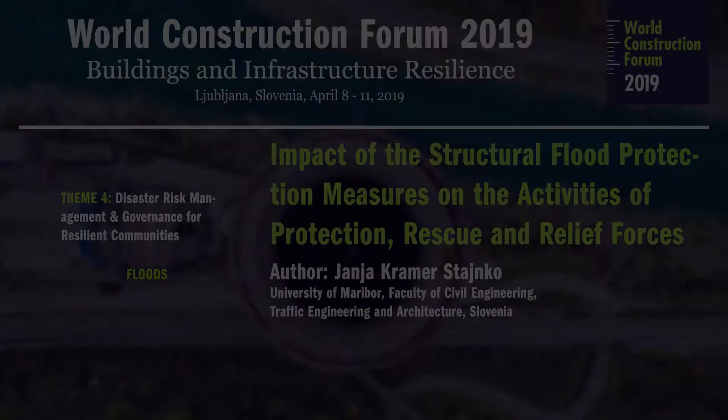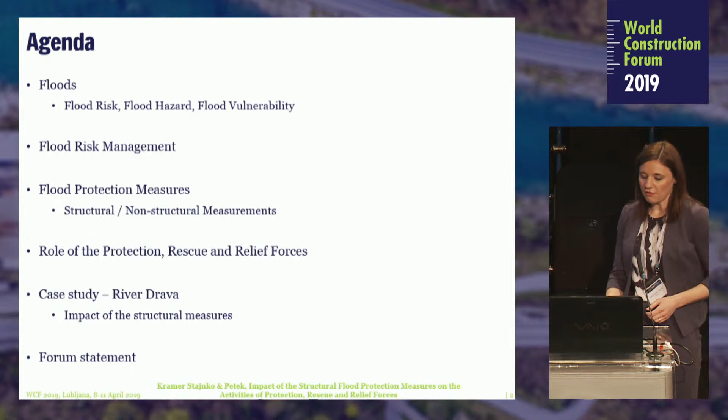I will also talk about the floods, since flood events in Slovenia are becoming more frequent recently, and also the intensity of flood events are growing. In my talk today, I would like to stress the importance of cooperation of different participants when fighting against floods, especially the role of protection, rescue, and relief forces. That is why this presentation was prepared together with the Firefighting Association of Slovenia.

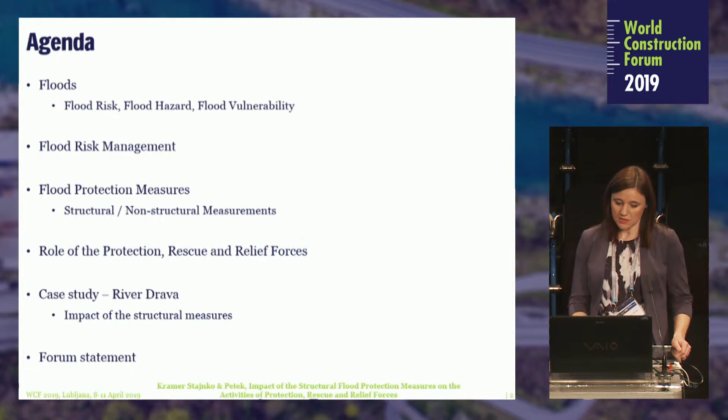I will present a case study on River Drava. In the last 7 years, we were victims of 3 flood or high water events, and during this time some structural measures were performed. At the end I will show a short analysis of the impact of these structural measures, especially on the work and activities of the rescue forces.

Flood events are a consequence of extreme weather conditions, and the flood risk in general is a function of unknowns, which is the flood hazard. This is mainly caused by natural phenomena, and we do not have a lot of influence on that, because it's solely natural. On the other hand, the flood vulnerability, which is a consequence of human activity and presence, we do have some impact on. We can prepare ourselves and make prevention measures to lower the flood risk.

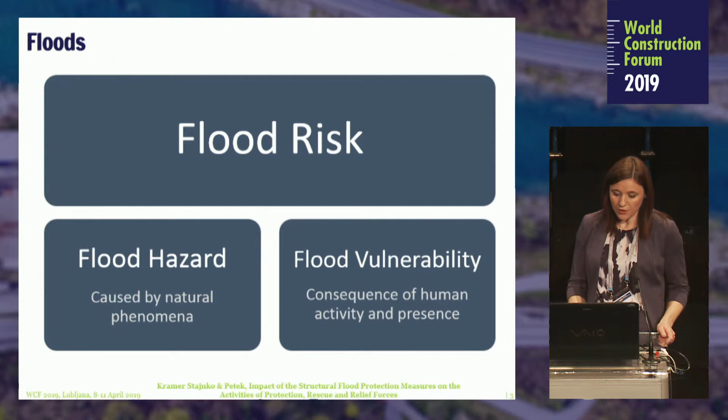The flood risk management aims to reduce the likelihood and also the impact of a flood, and it contains the following elements: in the first place, prevention, preparedness, preparation. Here it's really important that we perform non-constructional measures, so we do not construct buildings and industry in flood-prone areas. When the flood comes, the response and intervention is really important, and before that, informing the inhabitants and population what to do when the flood occurs, and how to act. Then in the last part, recovery, recondition, and reconstruction. In all these steps, the rescue forces play the main role.

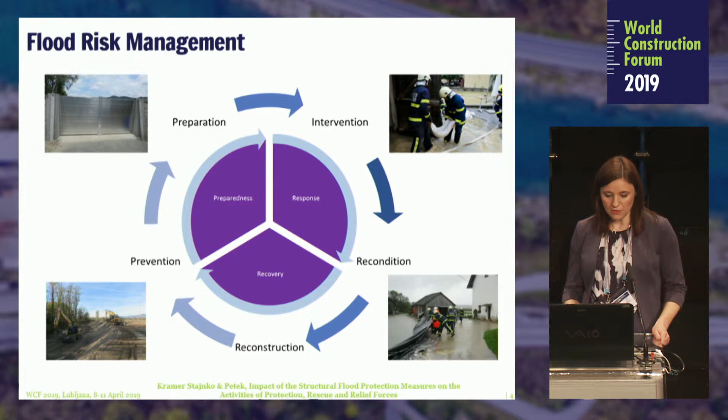In flood risk, we can fight with flood protection measures. In general, we can talk about structural and non-structural flood protection measures. The structural measures are, for example, high water embankments or high water containers, also protection walls. On the other hand, the non-structural measures are, for example, efficient forecasting of floods and determination of flood risk areas, like shown in these cases.

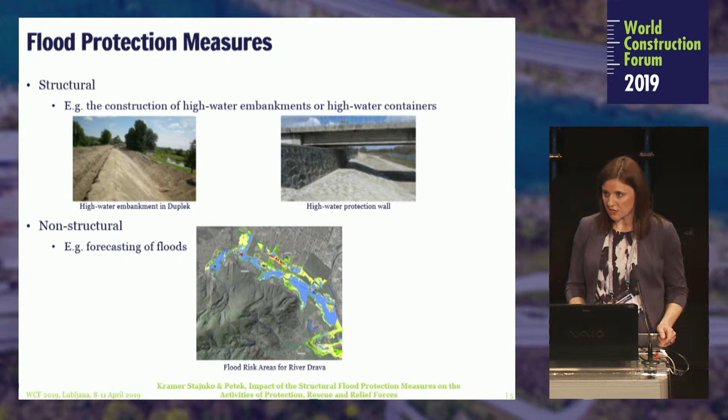The implementation of flood protection measures on the state level in Slovenia is in the hands of the Ministry of Environment and Spatial Planning, the Slovenian Agency of Environment, and the Slovenian Water Agency, and beside that, the administration of the Republic of Slovenia for civil protection and disaster relief, which also takes care of the protection, rescue, and relief forces. These are the capabilities of the state, local communities, as well as companies, institutes, and other organizations in case of natural or other disasters.

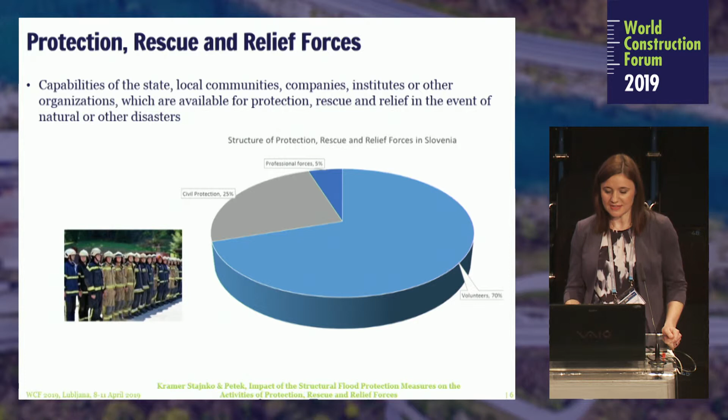Just a few numbers: at the moment we have more than 1,300 volunteer firefighting organizations in Slovenia, and more than 50,000 people who are ready to go to interventions in the event of natural or other disasters. This is really a phenomenon in Slovenia, and all other European countries would like to have a system like we have. So this is something we should really be proud about.

The case study I would like to show is a section of River Drava, between Maribor and Ptuj. As you know, the channel in this part is split into the natural channel and the channel which is for the needs of hydropower plant Zlatoličje. In the artificial channel, there can flow a discharge up to 500 cubic meters per second, and the rest of the water then goes into the natural channel.

So there are some problems when the discharge of Drava is really high, when it exceeds more than 1,000 cubic meters per second, and there we have some residential areas which could and can be flooded. This is especially in the area of Dogoše and Duplek.

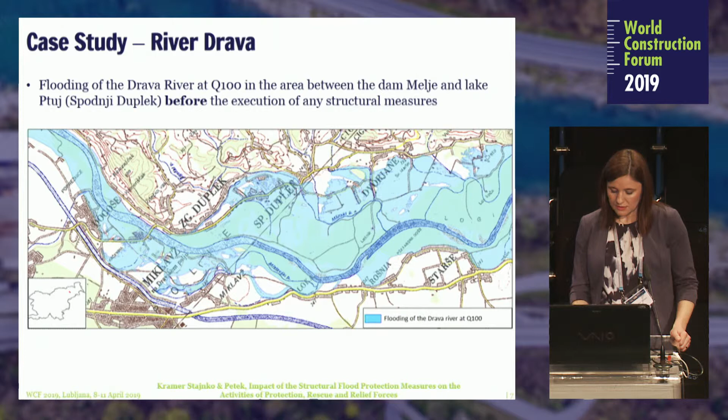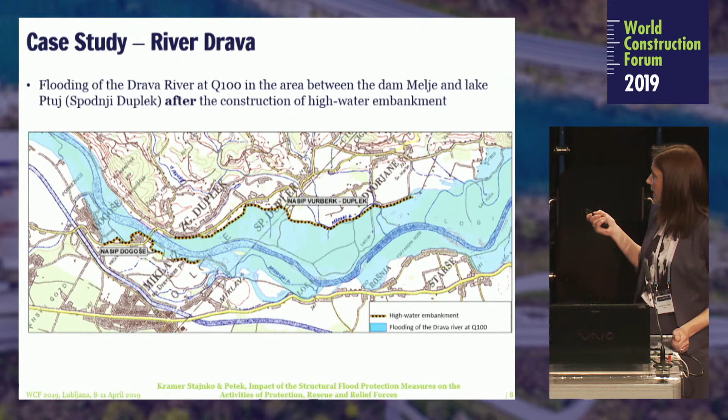In 2015, some structural measures were performed. A high water embankment was built in the area of Duplek, more than 5 kilometers long, and in the area of Dogoše, a high water protection wall as well as a high water embankment were built, more than 2 kilometers long.

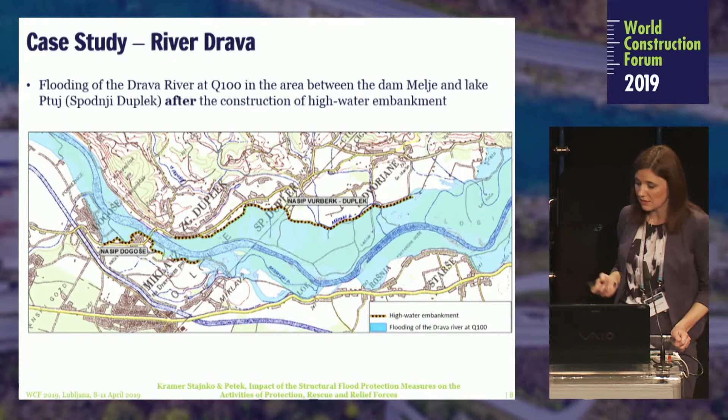As we can see on this figure, where the computational flooded area is shown, some areas are protected in case of a 100-year flood. Here we have a figure where the area in Dogoše is presented, without the protection measure and with the protection measure performed, and we can see a lot of houses and the whole residential area is now safe.

So we did have some, as I mentioned already, some flood events or high water events on River Drava.

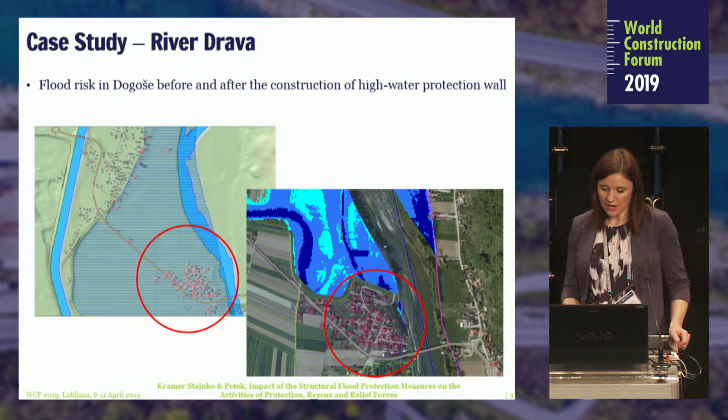Maybe a lot of you will remember the floods in 2012, in November. The discharge of River Drava at that time was more than 3,000 cubic meters per second. A lot of residential areas and sport objects were flooded, and the whole area of Duplek was really strongly flooded. Not only in this area, actually the area around the whole Drava in Slovenia was really damaged badly.

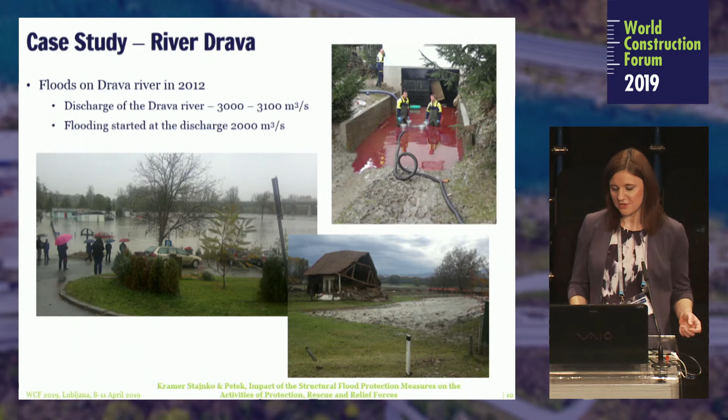In this case, when the flood comes, it is crucial to have an efficient rescue service. If we see the statistics from the rescue service in Maribor, at that time a lot of volunteer firefighters mainly were on the terrain, helping and fighting against the flood, together in cooperation with some other professional units.

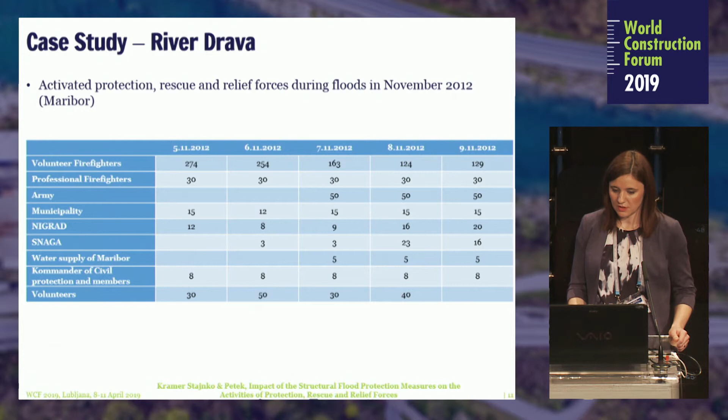Then another high water event on Drava River was in 2014. The memory from 2012 was still very alive, and this was good because the prevention and preparedness was really better.

A lot of people took care about the protection measures by themselves, and of course the rescue forces also helped with flood bags and protection walls. So the damage this year was not that bad, and also the discharge was really not as high as in 2012.

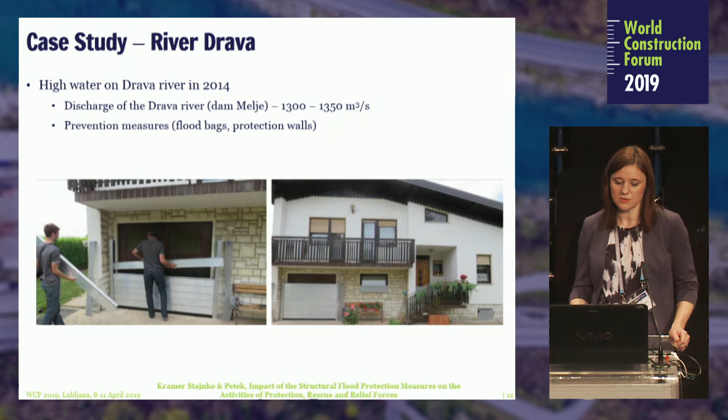All the rescue forces were prepared about the big flood, and all the people were also really well prepared, so no huge damage was caused. Some prevention measures were performed, like flood warning, flood bags, protection walls, and so on.

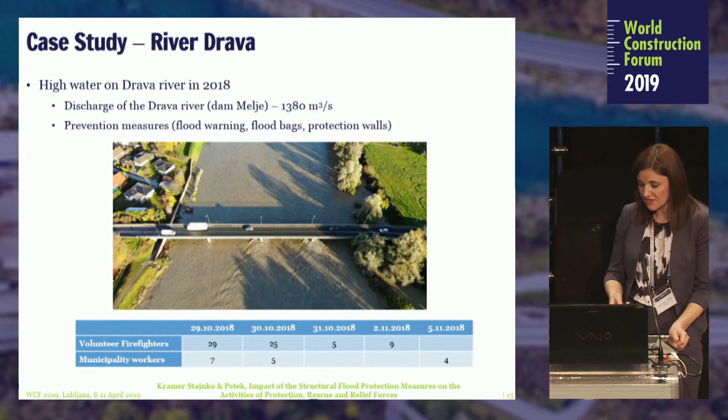Here is the statistics of volunteer firefighters, but this is for the area of Duplek, which were active at that time. We can see the number is really smaller than, for example, in 2012.

However, when we look at the reports of the rescue services, we still can see that the cooperation between the firefighters, in general the protection, rescue and relief forces, is good. But the flood risk is not completely eliminated. Some problems moved to other places, which we also can see from these reports, and I don't know if the experts are aware of that already.

Also, some agriculture areas are now flooded more frequently. Just for an example, people living at the Drava say that before the high water embankment in Duplek, the Drava started to flood the areas at a discharge around 1,500 cubic meters per second, and now, after the high water embankment was built, the Drava starts to flood the areas at a discharge of 1,200 cubic meters per second - a difference of 300 cubic meters per second.

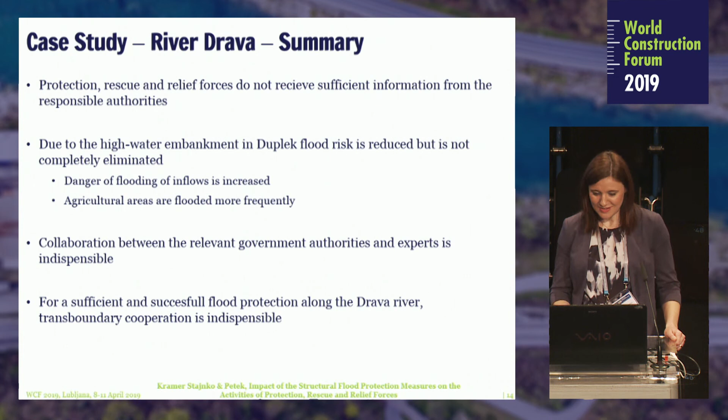So we can still find out that collaboration between the relevant government authorities and experts is indispensable, and for sufficient and successful flood protection along the Drava River, transboundary cooperation is indispensable, since the Drava River flows through more countries. So our forum statement would be that the flood risk can be reduced with structural measures, but

cannot be eliminated completely. Therefore, the efficiency of flood risk management depends on the activities of protection, rescue and relief forces. Thank you very much. Thank you.